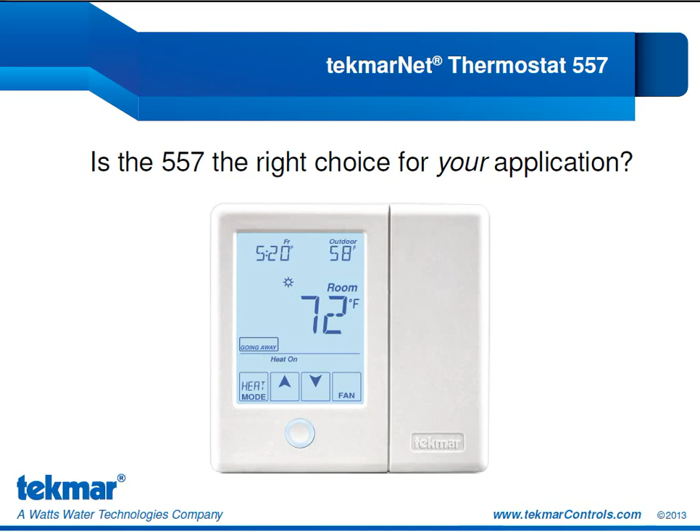This is the outline for today's presentation. We're going to start with humidity control settings. Relative humidity is a bit of a complex concept, so we're going to unravel it together today. We'll also revisit the 5 applications of the 557 as featured in the application brochure and outlined in the first webinar, but we're going to go into greater detail on the wiring and the essential settings in the setup menu that are specific to each of those applications. Lastly, we'll review the menus of the 557, with a particular focus on the Set, Temp, and Toolbox menus, to introduce the settings that may enhance the performance of your system.

These are the 5 applications of the 557 that were featured in the introductory webinar. The top 2 applications are traditional heat-cool equipment applications, and the bottom 3 applications are heat pump applications with the 557. The first traditional equipment application features a furnace and an air conditioner.

We have a single stage of heat being provided by the furnace, and we have up to 2 stages of cooling from our air conditioner. We also have a humidifier in the ductwork to provide some humidity control.

Our second traditional equipment application features a radiant floor and fan coil plus an air conditioner. We have a first stage of heat from the radiant floor, a second stage of heat with the fan coil, and up to 2 stages of cooling with the air conditioner. We again have the humidifier in the ductwork for humidity control.

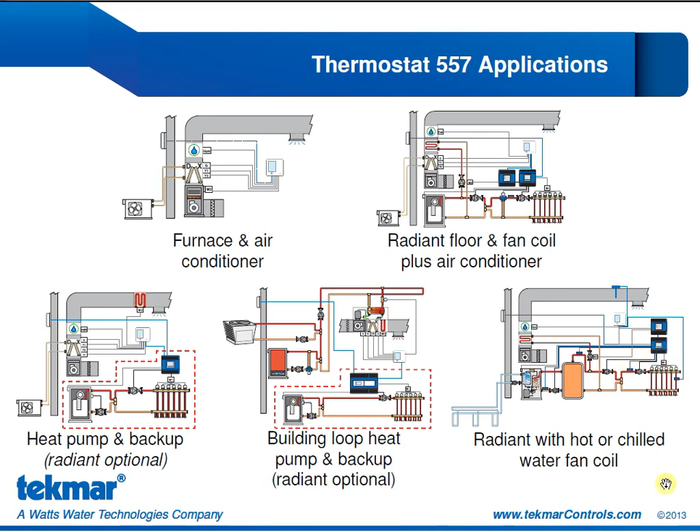One thing I want to clear up is a question that we have had asked at Tekmar: how many heat stages are possible? When can we have 3 or 4 stages of heat? And the answer is only with a ducted heat pump system.

So an example where we have 4 stages of heat is shown on the left-hand side, where we have radiant floor as first stage heat, a heat pump providing a second and third stage of heat, and an electric strip backup providing a fourth stage of heat. If you look at the example on the right, it is strictly a hydronic system, and only two stages of heat are possible, the radiant floor and the fan coil. We cannot control an electric strip backup in this situation with the 557.

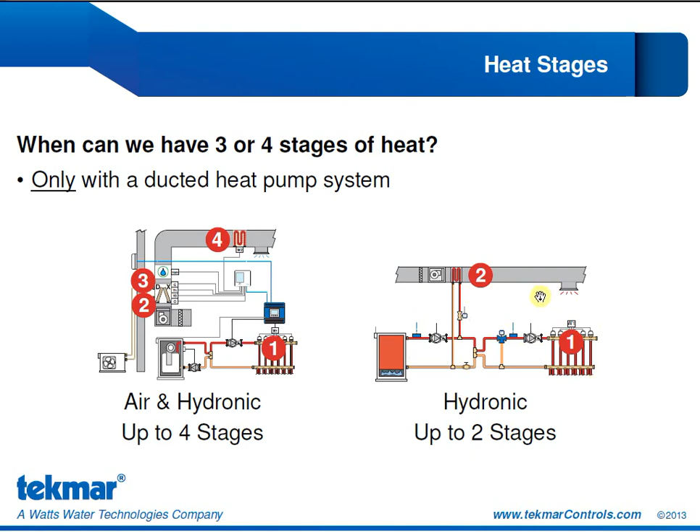The 557 measures and displays relative humidity, a term we're all familiar with but maybe not 100% clear on. What exactly is relative humidity? Well, it's the moisture content in the air compared to the potential moisture content in the air at a given temperature.

To appreciate this, we need to understand that as air temperature rises, the potential moisture content increases. As shown in the illustration, air at 80 degrees Fahrenheit can contain a lot more water vapor than air at 10 degrees Fahrenheit.

And that has to do with the thermal energy available for the water molecules to evaporate.

If we took this amount of water for a given airspace at 10 degrees Fahrenheit, it would result in 100% relative humidity. If we warm that air up to 80 degrees Fahrenheit, that same amount of water in the same airspace could result in a relative humidity of only 10%.

So relative humidity is meaningful because it provides context based on the air temperature of the room.

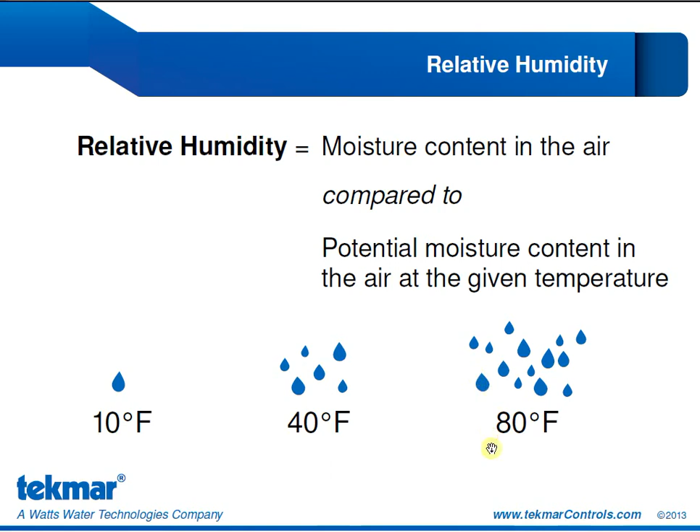Now that we know what relative humidity is, how do we control it? Well, we control it with the minimum and maximum humidity settings in the 557.

We can configure a relative humidity minimum ranging from 20 to 80%, or turn it off if we don't have a humidifier. The default in the 557 is 40%.

If we drop below the humidity minimum setting, we may notice dry skin, dry eyes, maybe difficulty breathing. Our kids might get nosebleeds. It's very uncomfortable. So we are going to enable the humidifier.

The humidifier would be enabled whenever the humidity drops below that minimum setting, and it will turn off when we are 5% above the minimum setting.

Similarly with the maximum, we can configure it from 20 to 80%, or turn it off if we don't have a dehumidifier. The default in the 557 is 60%.

If the humidity rises above that maximum setting, we may notice condensation on the windows. We might be worried about mold and bacteria. So we are going to enable a dehumidifier.

The dehumidifier will turn on whenever the humidity rises above that maximum setting, and it won't turn off until we are 5% below the maximum setting.

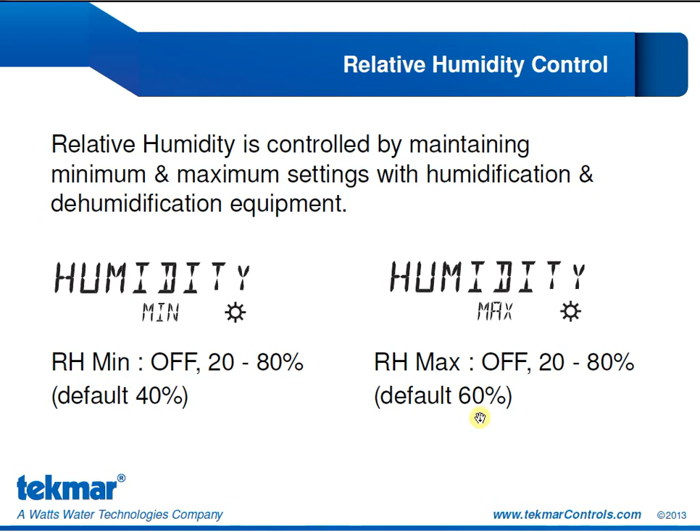So the relative humidity is maintained with a 5% differential above the minimum and below the maximum.

As we discussed, relative humidity depends on temperature. So what happens at night if we set back? Let's look at the example.

During the day, our air temperature is 72 degrees, and for the given amount of water vapor in the room, that could give us a relative humidity of 50%.

If at night we drop down to 65 degrees Fahrenheit, that same amount of water vapor in the air would give us a relative humidity of 64%, because colder air can contain less water vapor.

Now, if we used this value for relative humidity, it would probably trigger our dehumidifier to operate if we kept the default humidity maximum setting of 60%.

So we would enable the dehumidifier and remove some of that water vapor from the air. Well, then what happens the next day as it heats up?

That lower water vapor content might be below our relative humidity minimum setting, and then we would be enabling our humidifier. So we'd be encountering back and forth inefficient operation of the dehumidifier and humidifier, when the goal is to keep the moisture content in the room stable.

We don't want to be adding or removing moisture as a reaction to the change in air temperature in the unoccupied state.

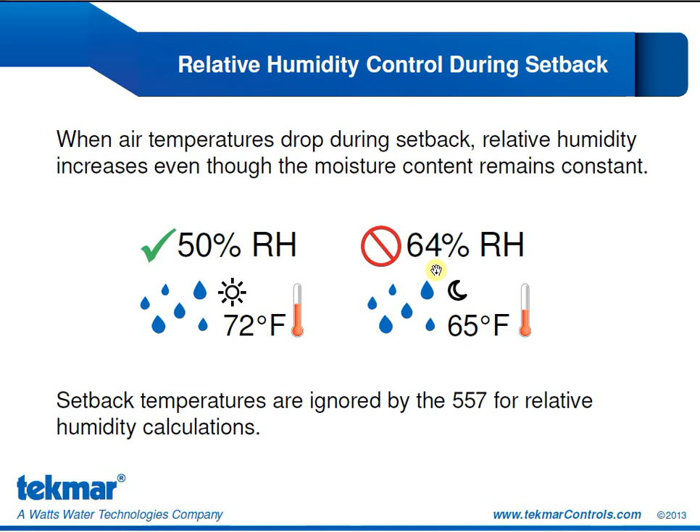We also use relative humidity for the dew point calculation. This dew point temperature is necessary for two operations: radiant cooling and operating an HRV.

For radiant cooling, we're going to be pairing the 557 with the 406 house control. In this case, the 406 house control will use the relative humidity measurement provided by the 557 to do the dew point temperature calculation.

This is in order to reset the water temperatures for radiant floor cooling, making sure we avoid condensation.

We talked about this operation in greater detail in the first webinar, so feel free to refresh by looking at that first webinar again on our website.

To operate an HRV, the 557 does the dew point calculation. We're only going to operate that HRV if the outdoor temperature is at least 5 degrees below the indoor dew point.

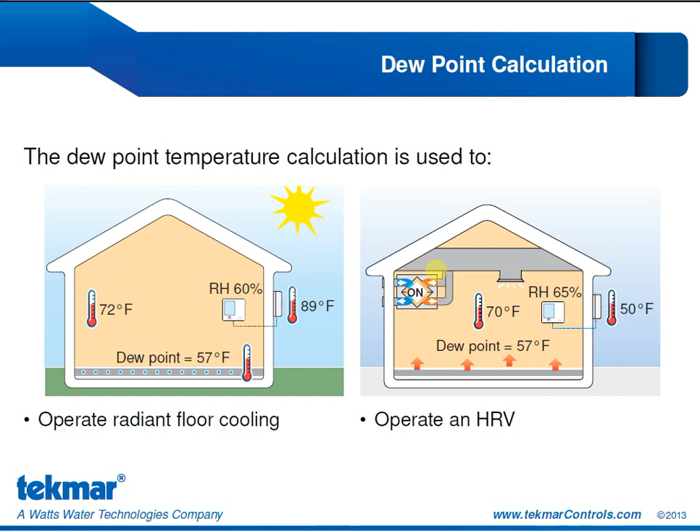We're going to discuss that in greater detail when we go over the dehumidification modes of the 557.

There are 3 humidification modes in the 557. The first, mode 1, is for a standalone humidifier. An example would be a console unit that has its own fan to blow air through a wet medium and into the space. If a unit like this did not have its own humidistat, the 557 could enable it as we needed humidification.

Humidification mode 2 is a humidifier that requires a fan. This type of humidifier can provide humidity without using the heat from your system, but it does need the system blower to move the water vapor through the building. An example of this is a steam injection humidifier, where water is boiled and injected into the duct, and then carried throughout the building through the ductwork by the system blower. This humidification mode can be operated year-long because we don't need to use or rely on the air heating from our HVAC system.

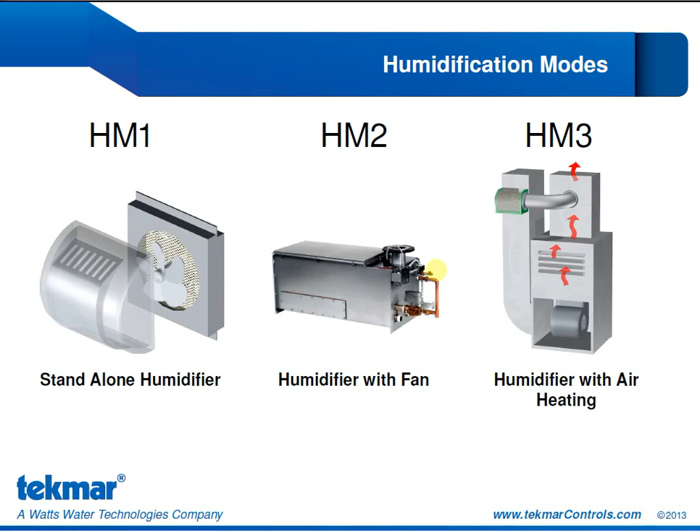The third humidification mode is a humidifier that does require air heating. An example would be a bypass humidifier, where heat from the system bypasses through a wet medium, collects humidity, and then transfers that humidity to the building through the ductwork. This is probably the most popular humidifier, but you are limited by your heating cycles. You cannot operate this year-round.

There are 5 dehumidification modes. The first mode, mode 1, is for a standalone dehumidifier. An example of that would be a compressor-driven coil. They have their own fan to pull air over 2 sets of refrigerant-filled coils to condense the water vapor out of the air.

Dehumidification mode 2 is for coil dehumidification. In this case, air passes over the cold coil, and the water vapor condenses, and the outgoing air becomes cooler and drier. Clearly, this is not available during heating. We have to be cooling for this to be possible. And it does require a duct sensor to make sure we don't freeze our coils.

Dehumidification mode 3 uses an HRV, and it exchanges stale indoor air with fresh outdoor air. It only works to dehumidify the air if the outdoor air is colder and drier than the indoor air. This happens, as we discussed earlier, if the outdoor temperature is at least 5 degrees below the indoor dew point. So typically this kind of condition is only present in the winter. It will not address moisture problems during other times of the year.

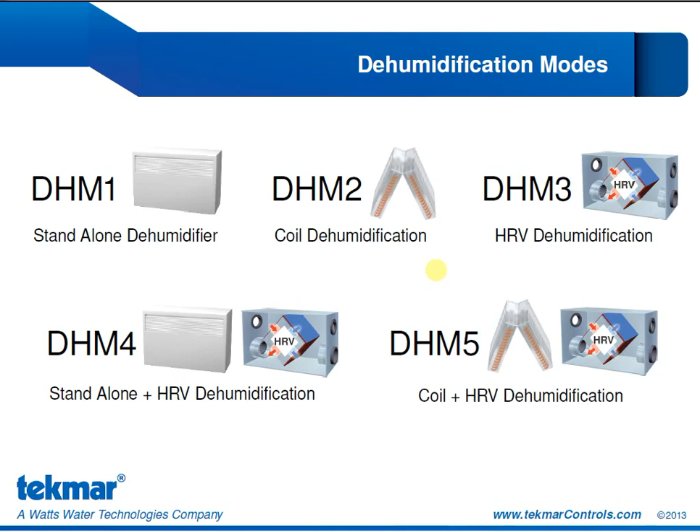Dehumidification mode 5 is a similar concept. We're going to use the HRV when we can, typically in the winter, and then we can use the coil during the other times of the year when we're in cooling mode. So it's kind of the perfect pairing. We have a dehumidifier for cooling mode and one for heating mode.

To elaborate a little bit more on the coil dehumidification, you can see in this picture we're showing a temperature in the ductwork of 45 degrees, and this acts like a limit. If the air temperature in the duct falls below 40 degrees, we're actually going to turn off the compressors and not allow the dehumidification operation.

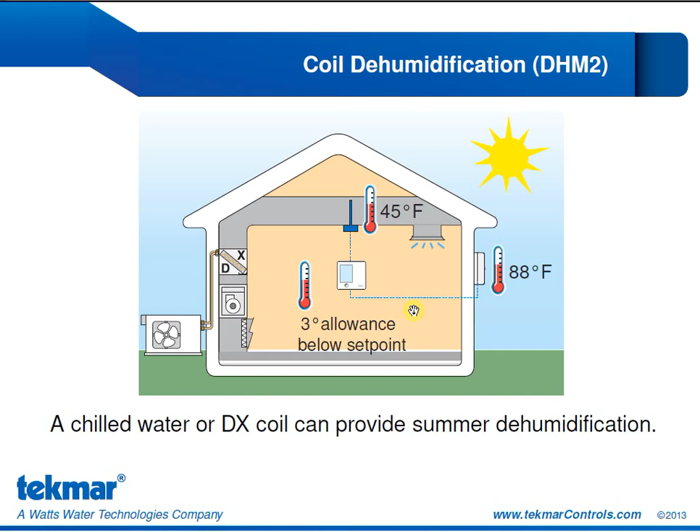So we're going to try and stay around 45. If it drops below 40, we turn off those compressors. We're also allowing the air temperature to fall up to 3 degrees below the set point, because that air coming out from the dehumidification operation is going to be colder, it will fall a little bit. We'll allow it to fall up to 3 degrees before we turn off the compressors.

Dehumidification with an HRV, as I said before, is possible if the outdoor air is at least 5 degrees below the indoor dew point. So the 557 will do the dew point temperature calculation based on the relative humidity of the room and based on the temperature of the room. If the outdoor temperature is at least 5 degrees below that indoor dew point, the HRV can turn on.

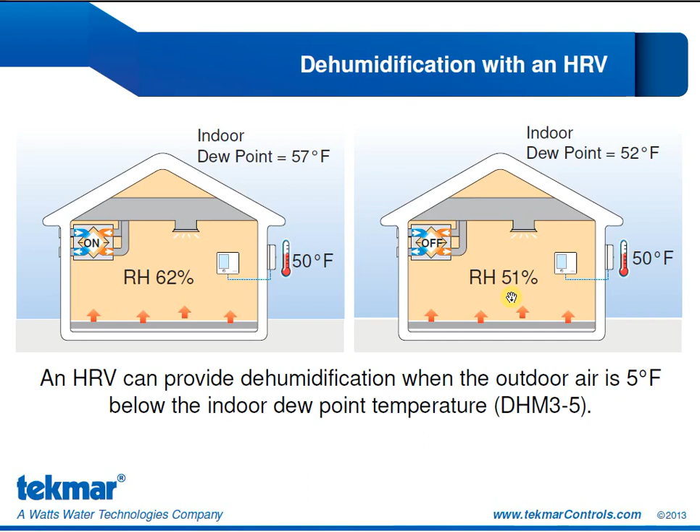Once the outdoor temperature is 2 degrees below the indoor dew point, we're going to turn the HRV off. But you can notice that we have actually managed to decrease our relative humidity from 62% to 51% while that HRV was operating. So it is a very effective mode of dehumidification when conditions allow it to operate.

We're going to jump now to our applications. Application number 1 is our forced air application with traditional heat-cool equipment. We have a single stage of heat being provided by our furnace, and that's being controlled through the W2 relay. When we're in cooling, we have up to 2 stages of cooling provided by our air conditioner controlled through the Y1 and Y2 relays. Of course, we need the fan to operate, controlled through the G relay.

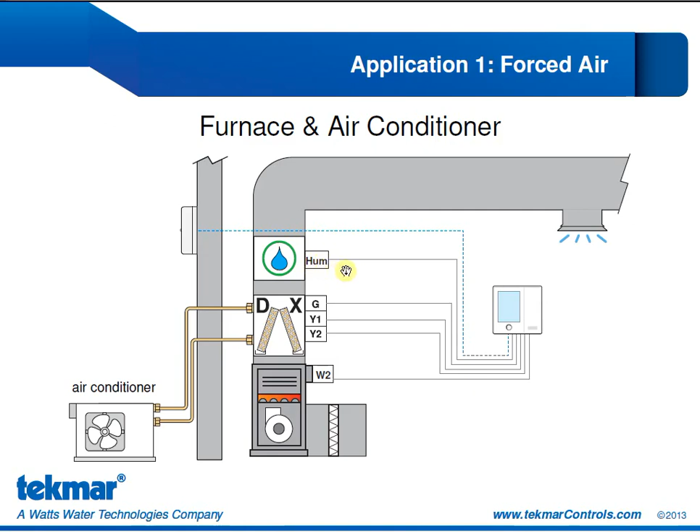You can also see a humidifier in the ductwork. It says HUM here, just to represent that this is a humidifier. It's actually controlled through the accessory relay.

Taking a look at the wiring here, we have the humidifier being enabled through the accessory relay. And then we have our connections to the furnace and air conditioner. W2 to the furnace, Y1, Y2 for the stages of air conditioning. R and C are power and common, and G for our fan.

Now let's trace these wires. We have our 24 volt R coming from the unit into the 557, connecting up here to the R, and that's being jumpered to RH2, which is connected to the W2, and then back to the furnace. Y1, Y2 are straight connections over to the 557, as is our G, and our common is going straight to the common on the 557.

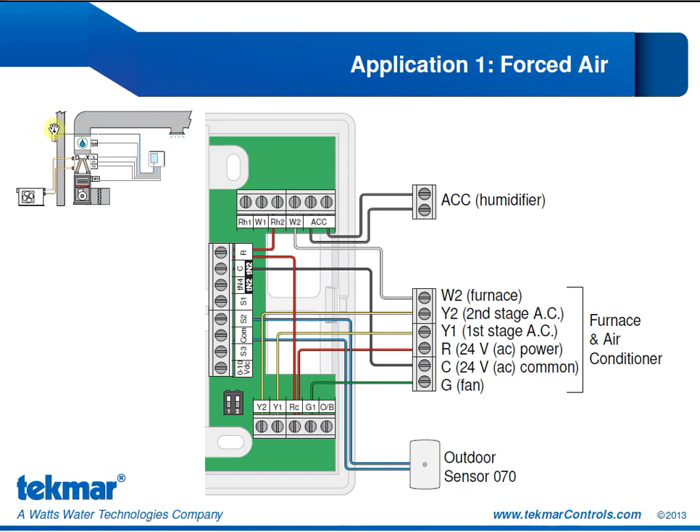We've also connected an outdoor sensor to the sensor 2 terminal. An outdoor sensor is not necessary for this operation, but it's something that would likely be desired by the residents. We've shown it on the mechanical, so we're showing it on the wiring diagram.

Here are the essential settings for this application. Sensor 2 is being configured for the outdoor sensor. It's not going to sensor 1 because sensor 1 cannot be configured to be an outdoor sensor.

W1 terminal is being set to none. The reason that's being set to none, let's look at the setting options. Our only options are for a high mass radiant floor or a low mass radiant floor, or other.

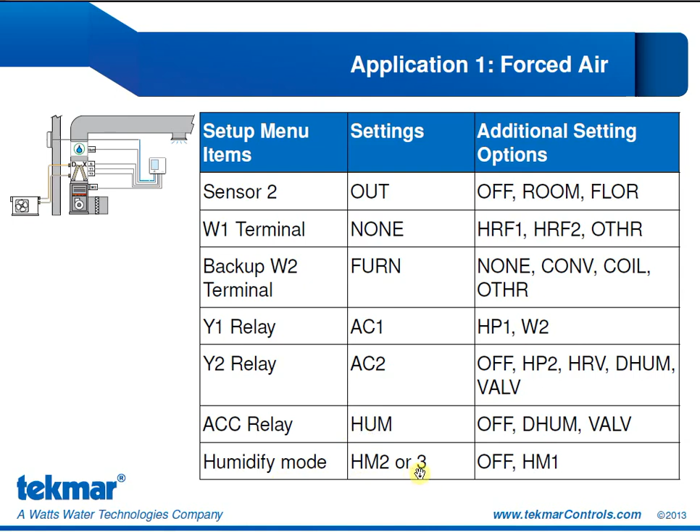So we're not going to control the furnace through the W1 terminal. We're going to control it through the W2 terminal, which we can configure to operate a furnace. Our Y1 and Y2 relays are the stages of air conditioner. Our accessory relay is controlling the humidifier, and because this humidifier is in the ductwork, it's going to be humidify mode 2 or 3. It is not a standalone humidifier.

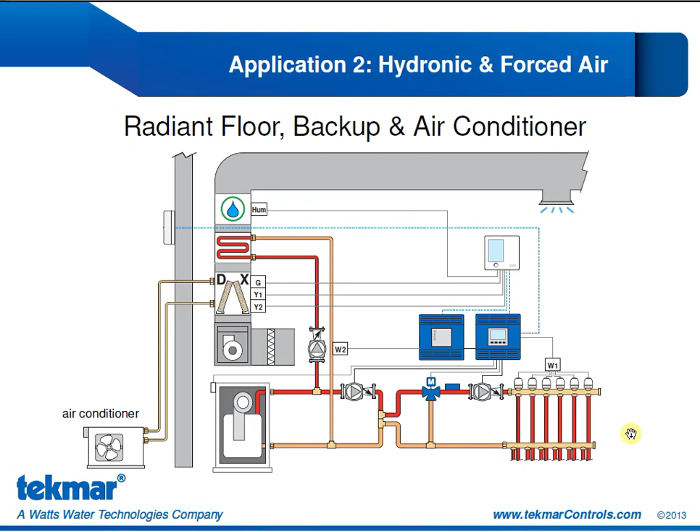Our second application with traditional heat-cool equipment is a radiant floor with a fan coil and an air conditioner. Our first stage of heat is the radiant floor, controlled through the house control. Our second stage of heat is the fan coil. And if we're in cooling mode, we have up to 2 stages of cooling, controlled through the Y1 and the Y2 relays. Again, we see a humidifier in the ductwork to provide some humidity control.

Taking a closer look at the wiring. Because we're going to be connecting to a house control for that radiant heat operation, we're going to connect the TN2 terminals over to our house control. So that first stage of heat is going to be communicated through the TN2. Notice there are no wires at RH1 or W1, because that first stage is all communicated through the TN2.

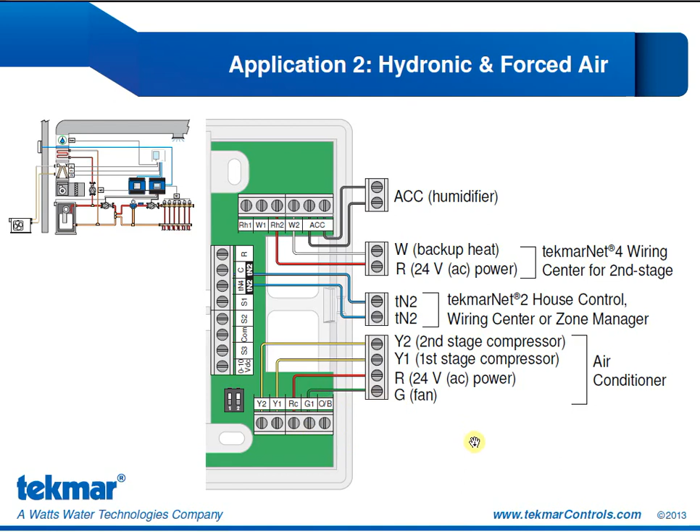Our second stage of heat will require us to bring the RH2 and W2 over to a tekmarNet 4 wiring center. So that will go to the W and the R for zone 1 on a tekmarNet 4 wiring center. We have the humidifier being controlled through the accessory relay, and we have our connections to the air conditioner. Power coming in, our Y1 and our Y2 connections for each stage of compressor, and the fan, of course.

Taking a look at our essential settings, this time we do have a radiant floor, so we're going to configure the W1 terminal for HRF 1 or 2, depending on whether it's a high mass or a low mass system. In this case, our backup W2 terminal is set to Coil. And whenever we're setting up our backup W2 terminal to a hydronic system, we have to program what the W2 source is going to be.

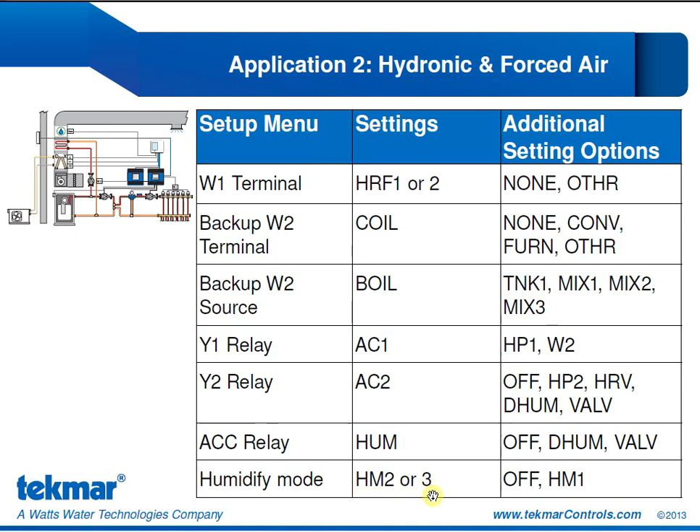In this case, it's high temperature. We're setting that source to boiler. Our Y1 and Y2 relays are controlling the stages of air conditioner. Accessory relay is controlling the humidifier. And because that humidifier is in the ductwork, humidify mode is 2 or 3.

Our third application, and our first heat pump application, is a radiant floor, which is optional, shown in the dashed red line. If we include it, that's our first stage of heat. Our second stage of heat is from the heat pump, operated with the Y1 relay. Our third stage of heat is also from the heat pump, operated with the Y2 relay. And we have a possible fourth stage of heat with the W2 relay that controls an electric strip backup.

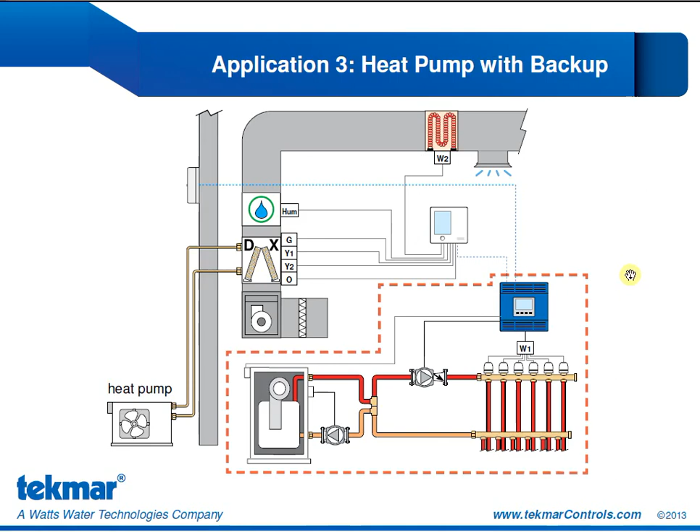When we're in cooling mode, we have up to 2 stages of cooling with the Y1 and the Y2. And in this case, we would power the O for the reversing valve. Notice we have a humidifier in the ductwork that is going to be controlling our relative humidity.

Taking a closer look at the wiring, if we include that radiant, then we're going to be communicating that call to a TN2 house control. The house control will be operating the valves and the pump for the radiant, and that hydronic call is communicated through the TN2 wires. Notice again, we have nothing on RH1 or W1.

Our second and third stages of heat from the heat pump are going to be controlled with the Y1 and Y2 connections. We also have the power coming in from the heat pump. We're connecting our backup heat, W2, at the heat pump as well. And we have our fan operation and O for the reversing valve.

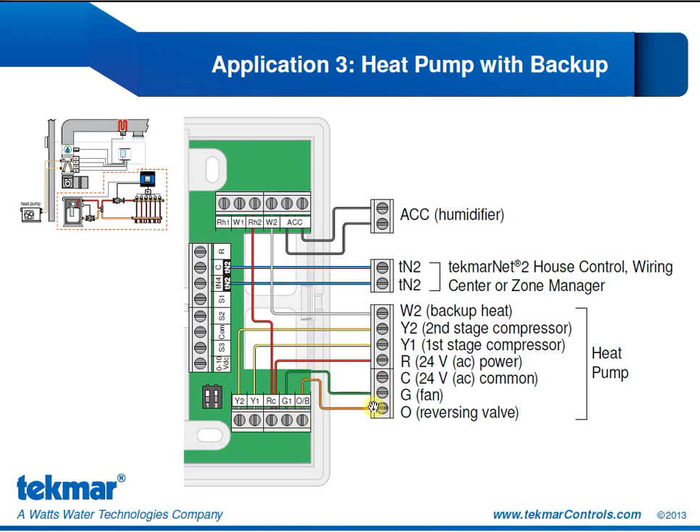So let's trace some of these wires. We have power from the heat pump coming in. We're bringing that up to our RH2, which is connected to W2, and coming over to the backup heat. R is also powering the Y1 and the Y2, as well as the fan, and we will use the O when we want to switch over to cooling mode.

These are the essential settings of this application. Again, if we are configuring it for a radiant system, the W1 terminal will be set for HRF 1 or 2 depending on the mass of the radiant floor. Our backup W2 terminal will be set to furnace, and this is because we need the fan operation for that electric strip backup. Y1 and Y2 relays are set for the heat pump stages 1 and 2. Our accessory relay is again set for the humidifier.

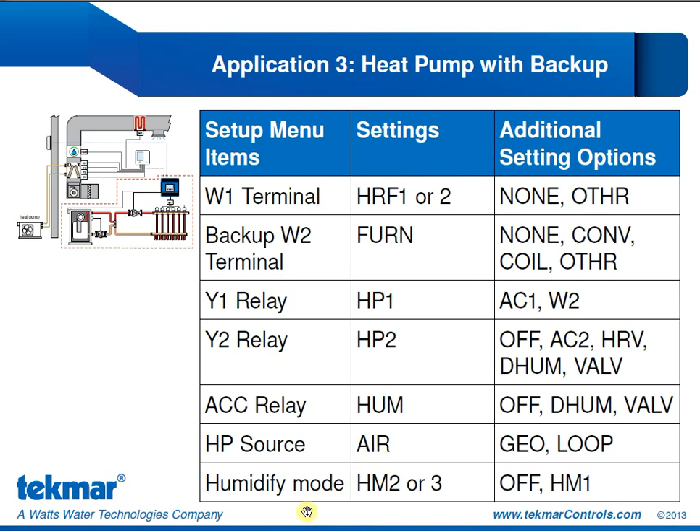Now we have to tell the 557 what the source is for our heat pump. In this case, it's an air source heat pump. And because that humidifier is in the ductwork, the humidify mode is 2 or 3.

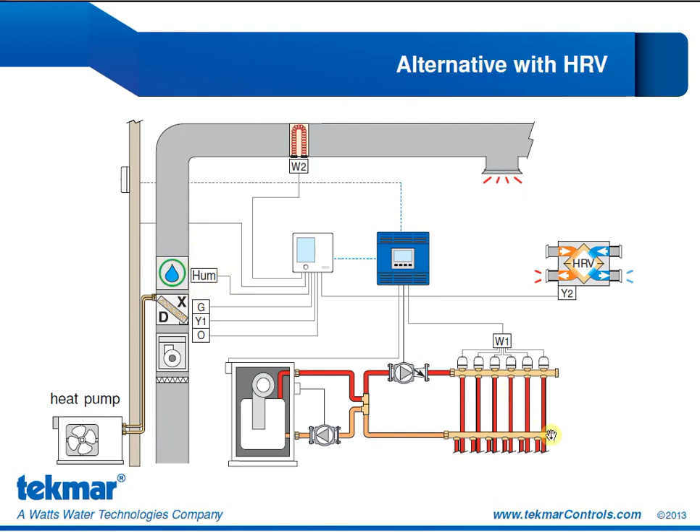When we're in cooling mode, we have one stage of cooling from the heat pump, and we are showing the humidifier in the ductwork.

Let's look at the wiring. We see those TN2 connections to a house control for the radiant operation. So the house control will be controlling the valves and the pump for the radiant. Our second stage of heat is at our heat pump. We have the Y1 connection only. So R comes in from our heat pump and is going to the Y1. We have the fan obviously and O for the reversing valve to switch into cooling mode.

Now let's look at our HRV. We have R coming in from the heat pump because Y2 is not an isolated relay. It's connected to that R from the heat pump. Y2 goes over to the HRV, and to complete that circuit, the common has to tie back to the common on the heat pump.

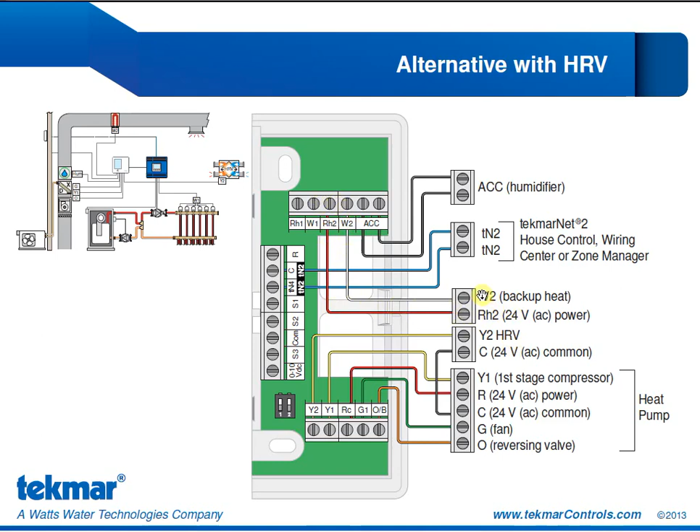Our third stage of heat, the backup electric strip, it is an isolated relay, so it's a simple connection, RH2, W2.

The essential settings for this. Now in this case, we absolutely require an outdoor sensor, because if you remember, the HRV can only be operated if the outdoor temperature is at least 5 degrees below the indoor dew point. So we're going to configure sensor 2 for our outdoor sensor. Our W1 terminal will be set to HRF 1 or HRF 2, depending on the mass of the radiant. Our backup W2 terminal, that electric backup strip, will be set to furnace for the fan operation. Our Y1 relay will be set for our heat pump. This time Y2 relay will be set for the HRV.

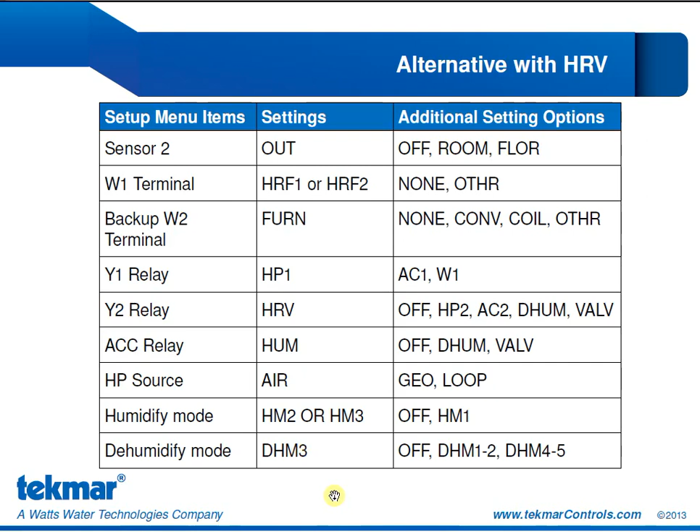Again, the accessory relay is going to be controlling a humidifier. It is an air source heat pump. Because the humidifier is in the ductwork, we're going to be using humidify mode 2 or humidify mode 3. And now that we are using an HRV for dehumidification, we will set our dehumidification mode at number 3 for the HRV.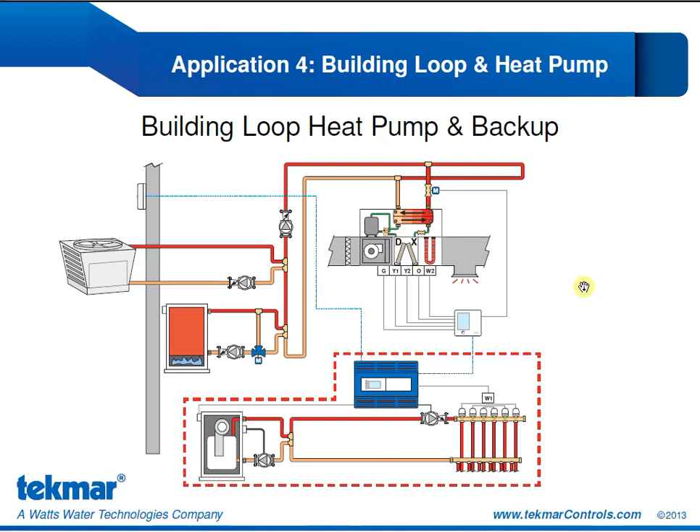So this type of application is usually seen in hotels or conference centers, multifamily residences, apartment buildings, where each unit has its own water-to-air heat pump so that each unit has individualized temperature control. Some can be in heating, some can be in cooling.

Taking a look at the wiring, because this time we are not connected to a house control, we're connected to a TN4 system control. We have our TN4 wire over to our control and our C to the TN4 control. R is coming in from the control to R in the 557. We're jumping it to RH1 and then bringing W back to the TN4 system control.

Our heat pump connections: we have the R from our heat pump coming into the 557. We have our Y1 and Y2 connections at our heat pump. O for the reversing valve and G for the fan.

Notice here as well that this time the accessory relay is controlling a building loop zone valve. So we have R from our heat pump coming in, coming up to RH2, and then jumped over to the accessory relay. Accessory relay brings that connection to the zone loop valve, and then the C comes back to the heat pump to complete the circuit.

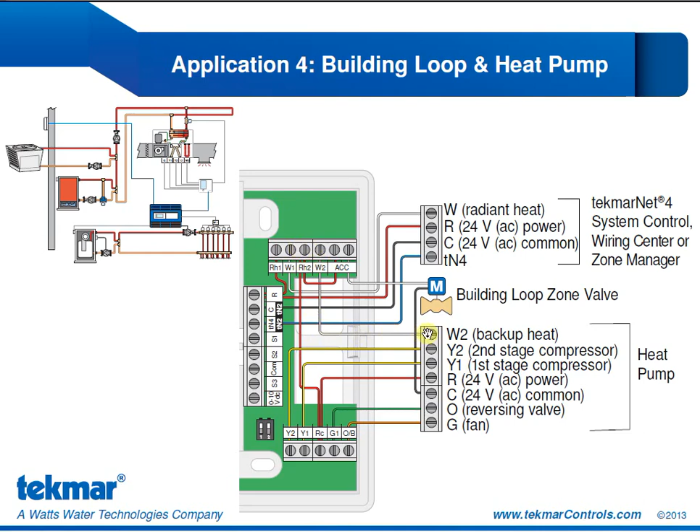For that backup electric strip, we have, again, R coming in from the heat pump up to RH2, which is connected to W2, W2 back to the heat pump for the operation of the electric strip backup.

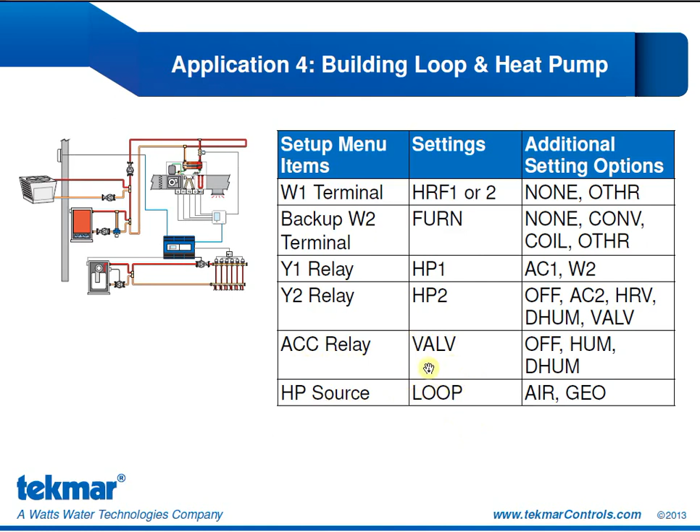Here are the essential settings for this application. If we include the radiant, W1 terminal is HRF 1 or 2. The backup W2 terminal is set to furnace for the electric strip. Y1 and Y2 relays are configured for our heat pump stages 1 and 2. This time our accessory relay is controlling the valve, and the heat pump is a loop.

Our last application shows a water-to-water heat pump. And again, this application requires you to pair the 557 with the 406 house control. So we have our water-to-water heat pump that will keep this buffer tank with either heated water or chilled water, depending if we're in heat or cool mode.

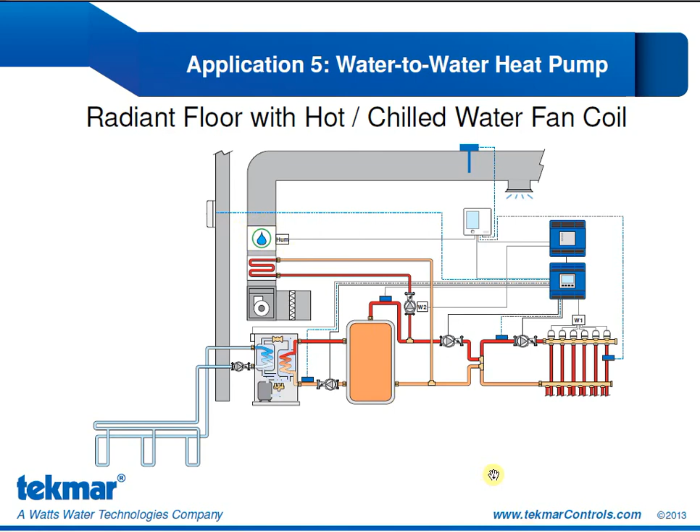If we're in heat mode, then we have our first stage of heat with the radiant, our second stage of heat with the fan coil. If we switch over to cooling mode, this tank will be filled with chilled water. Our fan coil will be first stage cooling, and we have the option of doing radiant floor cooling as well. There is also a humidifier in the ductwork for some relative humidity control.

Taking a look at our wiring. Because we're connected to a TN2 house control, we have our TN2 connections from the 557 to the house control. Our second stage of heat, the fan coil, we have to bring the RH2 and W2 connections over to a tekmarNet 4 wiring center, to the R and the W on the wiring center.

Our accessory relay is controlling the humidifier as shown in the ductwork. And this time we're also going to use the fan coil for some dehumidification. It's there, let's use it for dehumidification. So we have our R from the fan coil coming in, and the Y2 being used to enable the dehumidification, and of course the fan with the G.

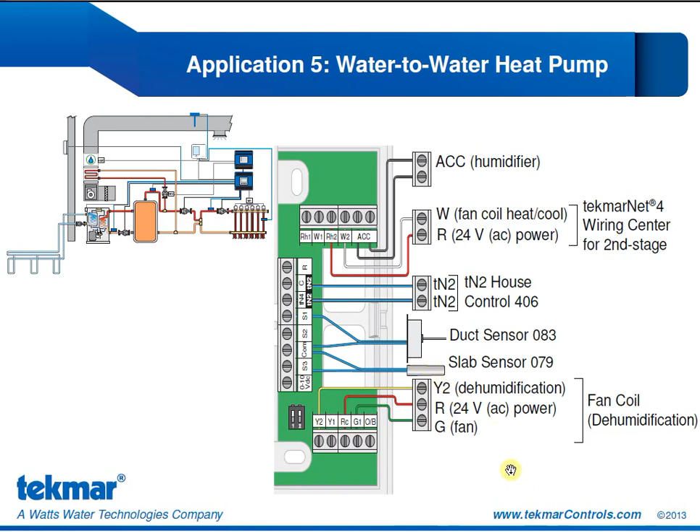We do need a duct sensor if we're going to be doing coil dehumidification to make sure those coils don't freeze. And we also show a connection to a slab sensor to give us some control with radiant floor cooling and for radiant warming as well. The slab sensor is not required, it just provides us the option of having some better control over that system.

Here are the essential settings. Sensor 1 will be configured for the duct sensor, and sensor 2 would be configured for the floor sensor if you're using that slab sensor. Our W1 terminal is set for our radiant floor. Backup W2 is set for coil.

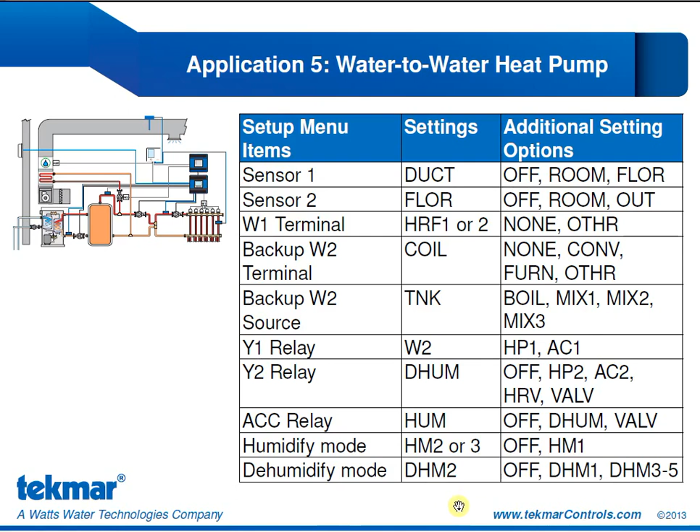And again, it's hydronic, so we have to specify the backup W2 source. In this case, it's coming off the tank, so tank is our source. Our Y1 relay is going to be configured for W2 because our first stage of cooling is that fan coil. Our Y2 relay will be configured for dehumidification. Our accessory relay configured for the humidifier operation. Because that humidifier is in the ductwork, that is humidify mode 2 or 3, and our dehumidification mode is 2 for the coil operation.

I want to look at some other settings that are not essential but will enhance the performance of your system. The first we're going to look at are the Y2 and W2 differential settings.

If W2 is the only source of heat, for example when using that W2 relay to control a single stage furnace, then you cannot specify the differential. The differential will be fixed at 1 degree below set heat room and 1 degree above set heat room. So the W2 relay will turn on when we are 1 degree below, and it'll turn off when we're 1 degree above.

If we are using W1, W2, Y1, and Y2, an example would be radiant floor as first stage, heat pump as second and third stage, and electric strip backup as fourth stage. Our W1 will be operating with PWM, pulse width modulation. Our second stage of heat, Y1, has a fixed differential of 1 degree, so when we are 1 degree below set heat room, our Y1 will be enabled.

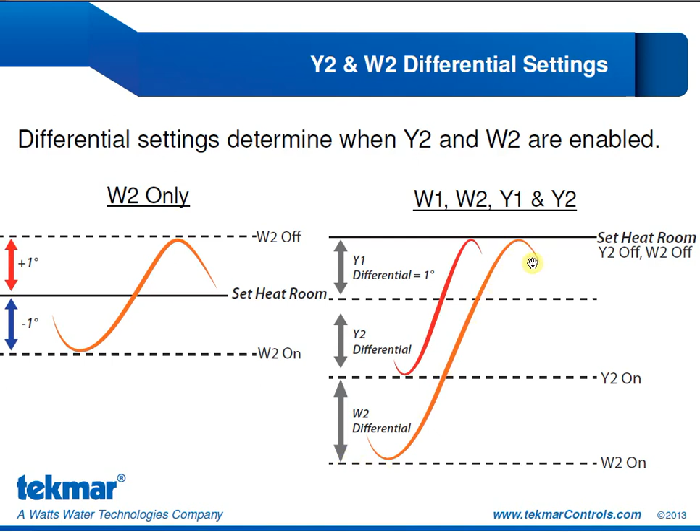Our W2 differential is also configurable. It goes from 0 to 8 degrees. W2 will turn on when we are 1 degree plus the Y2 differential plus the W2 differential below the set heat room, and it won't turn off until we're at the set heat.

The backup delay, or W2 delay, is the minimum amount of time that the first stage, W1, and the heat pump must be operating before W2 can turn on. Two conditions have to be met for W2 to turn on: first, the W2 differential must be met, and second, the W2 delay time must have expired. We can configure this for auto mode, with no additional delay, or for a time ranging between 5 to 180 minutes, so we can hold off W2 for up to 3 hours if we want to.

Or we can put it into override mode, in which W2 will only turn on when we're in emergency mode, so in that case our W2 really would be a backup source of heat. The backup delay is not used in emergency mode, since only W1 and W2 operate then. We're not going to enforce an additional delay on W2 when we only have W1 and W2 — we'll bring W2 on as needed.

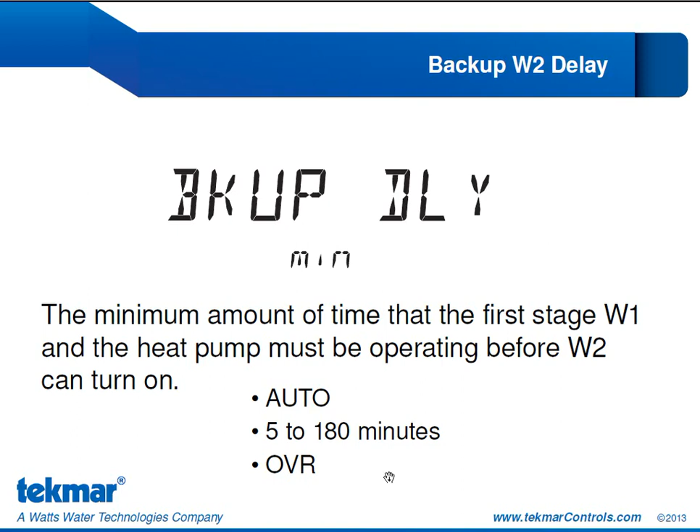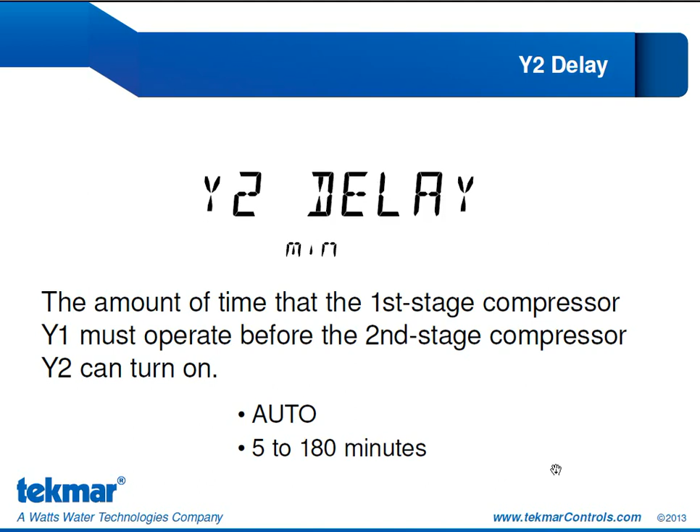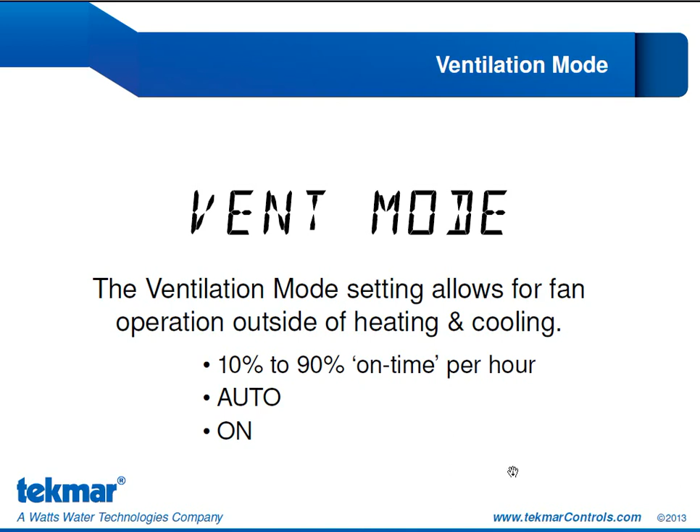The settings we've looked at so far are in the setup menu. These are where we can find the essential settings for the 557. The other menus we'll look at today are the Set Temp menu and the Toolbox menu.

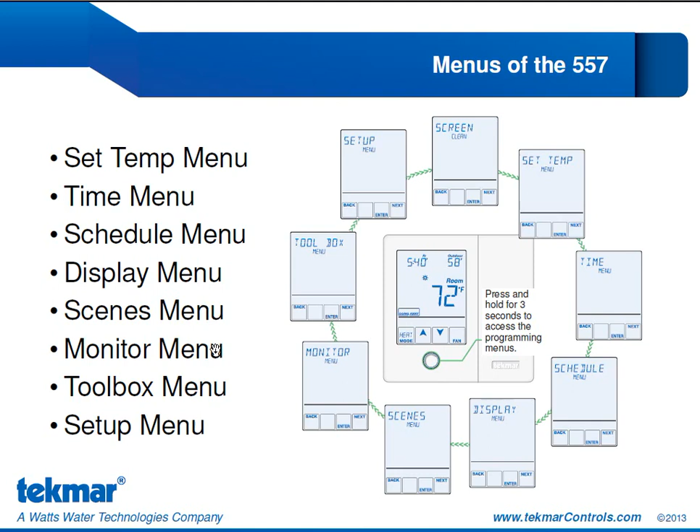The Set Temp menu is where you program your heating and cooling temperatures for each scheduled event. Here is where we configure the set heat room for occupied, unoccupied, and away time, and the set cool room for unoccupied, occupied, and away time. It's also where we set up our minimum and maximum limits — our floor min and floor max for occupied, unoccupied, and away.

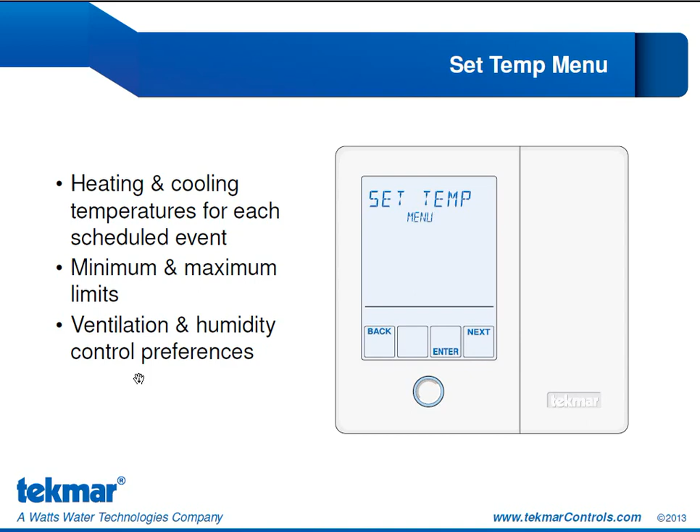The Set Temp menu is also where we program our ventilation and humidity control preferences. Here we set up our relative humidity minimum and maximum percentages for occupied and unoccupied times, and where we configure our ventilation. We turn ventilation mode on or off in the setup menu, and configure it in the Set Temp menu — setting it to auto, a percent on time, or on.

Our Toolbox menu is very useful for troubleshooting. As a tech person, this is where I start when I'm trying to diagnose a problem on a 557, because it provides so much information to me. Here is where I can configure the access level. Obviously I need an installer to configure the settings of the 557, but once I'm done setting it up, it is advisable to reduce that access level to user, limited, or secure. That way we can try to prevent homeowners from changing settings inadvertently that end up triggering errors on the system.

Status info provides a lot of information. This is where we can see if the 557 is in normal operation, if it's an override, or if it's in radiant floor warm weather shutdown. We talked about that in greater detail in the first webinar. To review, radiant floor warm weather shutdown holds off the radiant floor during the shoulder seasons of spring and fall, so that we're not charging up the floors in the early morning to have them radiate heat that's not necessary in the afternoon. Instead, we'll use our heat pump.

Status info is also where we'll see if we're in floor cooling operation, if we're in warm weather shutdown or cold weather shutdown, if we're in optimum start, if we've hit a floor min or a floor max, if hydronic heat has been forced off. This happens if the 557, as an air group master, is in cooling mode and is holding off that hydronic heat while cooling. It also tells us if we're in the interlock wait period between heating and cooling.

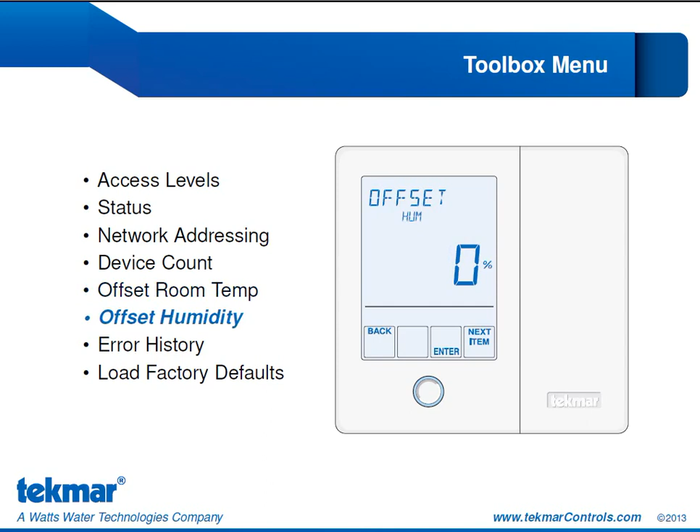In the Toolbox menu, we can also offset the room temperature. So if we've installed the 557 in a location where it might be subject to airflow resulting in an inaccurate measurement of the room temperature, we can offset it by either 5 degrees below all the way up to 5 degrees above the actual measurement. Likewise, we can offset humidity from minus 10% all the way to plus 10%.

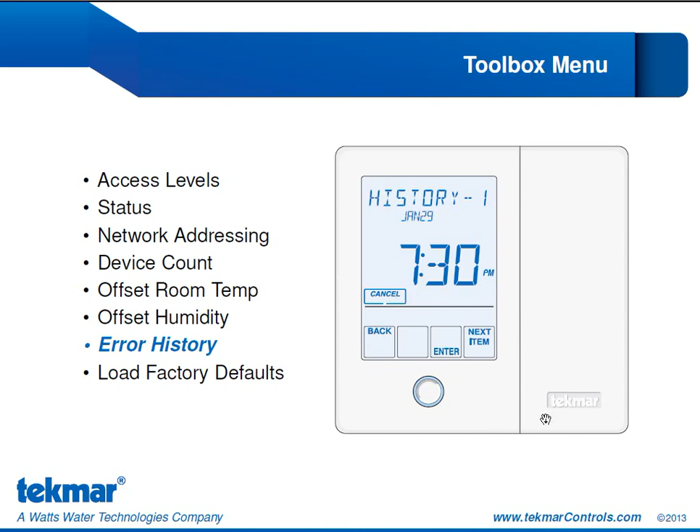A very useful item in the Toolbox menu is the error history. This displays the last 5 errors that have occurred on the thermostat in the past 30 days, and each error is date and time stamped. In this example on the screen, our first error in the history occurred on January 29th at 7:30 p.m. This screen would actually toggle to a screen that shows the exact error message. If I no longer want that error message held in the history, I can press cancel.

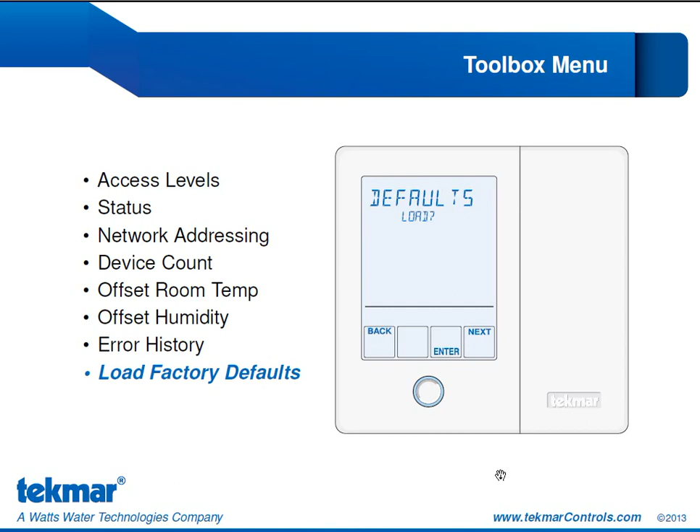The Toolbox menu is also where I can load the factory default. So if I want to start afresh, I can go in here to load the defaults and maybe configure settings from there.

To summarize today's presentation, we started by looking at relative humidity: what is it, and how do we control it? We looked at the humidification modes and the dehumidification modes, and how each mode is particular to a certain type of equipment, so that we understand how to configure the 557 for the equipment and application we're using. We looked at the essential settings and the electrical wiring for each of the 557 applications featured in the data brochure that we went through in our first webinar.

We talked about all the different menus of the 557, with a focus on the Set Temp menu and the Toolbox menu, and looked at the items we can configure in the Set Temp menu, and what kind of troubleshooting we can do in the Toolbox menu.

I hope you found this information useful and informative. Keep in mind that additional information can be found on our website, www.tekmarcontrols.com, where you can download the data and application brochures for the 557. We hope that after learning how the relays can be wired and configured, you have a strong sense of the versatility and superior functionality of the 557 thermostat, and that you can confidently determine if this 557 thermostat is the right choice for your application.